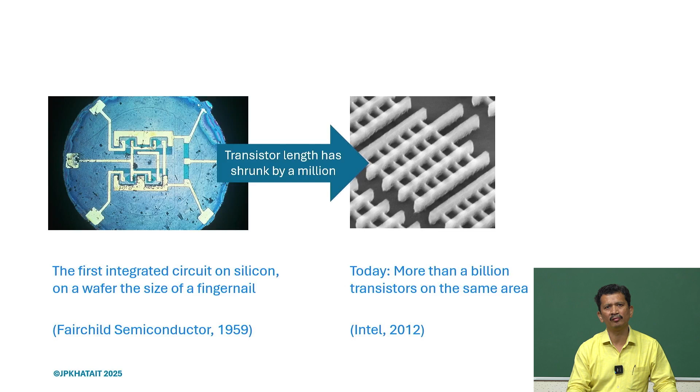So, what you observe here is that in 1959 Fairchild Semiconductor produced the first chip, the size of a fingernail, the first integrated circuit on silicon on a wafer. But now, in 2012, the size of the chip is the same, yet the number of transistors on a chip has increased tremendously, almost a million times, and you now have billions of transistors on the same chip.

And Intel has projected that by 2030 there will be 1 trillion transistors in a chip. So, you can see how things are moving. It is not that the size of the chip is increasing, but the size of the transistors is decreasing, and we are cramming all those transistors into the same footprint, almost the size of a fingernail tip.

If you want a very good overview of the semiconductor industry and how it has evolved, this is a very good read: Chip War by Chris Miller. What we realize is that today semiconductors are the new oil, driving everything. If the semiconductor industry gets affected and the chips are not delivered in time, nothing will move, because it affects the production of every product, machine, and equipment we use today.

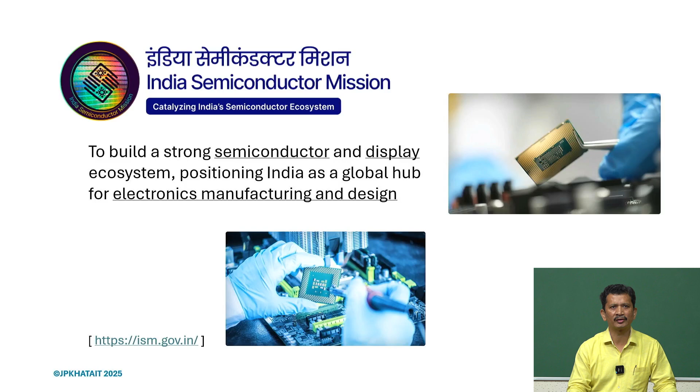We are also not behind. Though we started late, the government has started the India Semiconductor Mission, with the emphasis to build a semiconductor and display ecosystem, positioning India as a global hub for electronics manufacturing and design. Under this initiative, 76,000 crore is already invested, and 5 projects are approved for the semiconductor and display manufacturing ecosystem in India. So, are we ready for that, or are we simply relying on instruments or machines built elsewhere?

If semiconductor manufacturing is coming to India, what kind of support can we provide? Can we design and develop systems for our own use? Do we have the manpower and the know-how, so that we are not totally dependent on others, but can develop these systems and slowly localize semiconductor manufacturing here in India?

So, I think it is very important to understand what the semiconductor manufacturing ecosystem looks like. There are several processes. We have wafers, so a lot of wafer makers will be involved. Then there are several processes: cleaning, deposition, lithography, etching, CMP, and packaging.

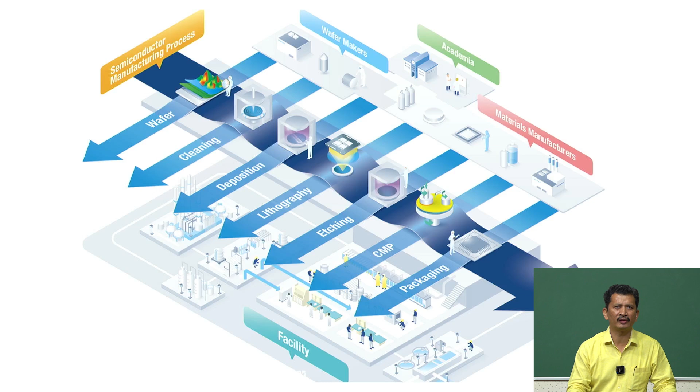So, first try to understand how these chips are made, and if you do not know, you may be surprised to know that the raw material for these chips is actually sand. So, we start with the sand, and then it is melted, and we try to get pure silicon in its purest form, and then you convert into silicon ingots, and then it has to be sliced into thin wafers,

and the wafer will be the input material which undergoes a lot of chemical processes, different kinds of processes under different kinds of machines, and ultimately chips will be delivered. So, going further, we start with the silicon ingot. We do the slicing there, first slicing, and the quality of these wafers may not be very good. So, it has to be polished to the requirements. The order of thickness of these wafers might be about 700 to 800 microns.

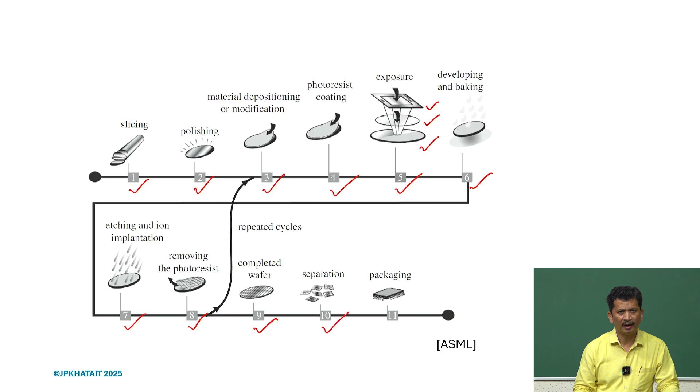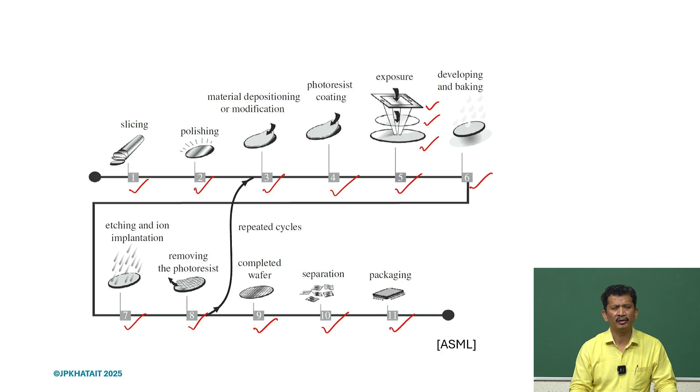Like etching, ion implantation, and we'll remove the photoresist. Then there will be many repeated cycles, because we will be creating layers and layers, and once the entire process is completed, we get the completed wafer, and this wafer has many chips. They will be separated, diced, and then these individual chips will be packaged, and we will get the devices. So, each and every step is very intricate and involves a lot of precision processing and precision instruments, machines, equipment.

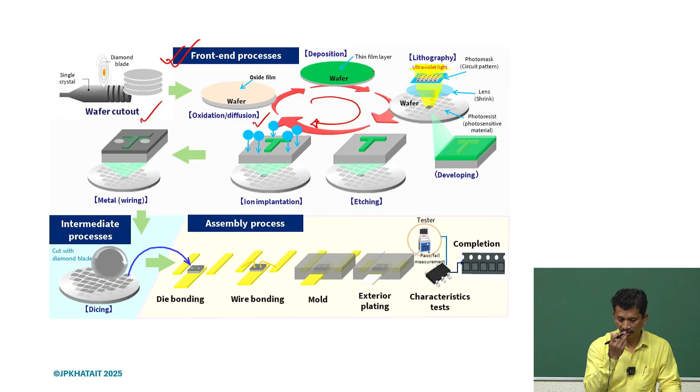So, if we try to characterize, we can divide into different kinds of processes. Usually, one is called front end processes, which involve lithography operations. So, what do you see here? Many cycles. As I just mentioned in the previous slide, we have this wafer, and then there will be oxidation, diffusion. We do a lot of chemical processes. Then a thin film layer will be put there, and then it will come under the lithography system, the design will be shined, and we will do the developing, etching and implantation, and it will be repeated through many cycles.

And then the metal wiring will be done. Again, it is also a kind of deposition process, and once it is done, the dicing will be done, so we will get the individual chips. The assembly process is generally termed as back end processes. We take this individual chip, then die bonding, then wire bonding, mold, plating, and then it will be individually tested, and we will get the device, the chip.

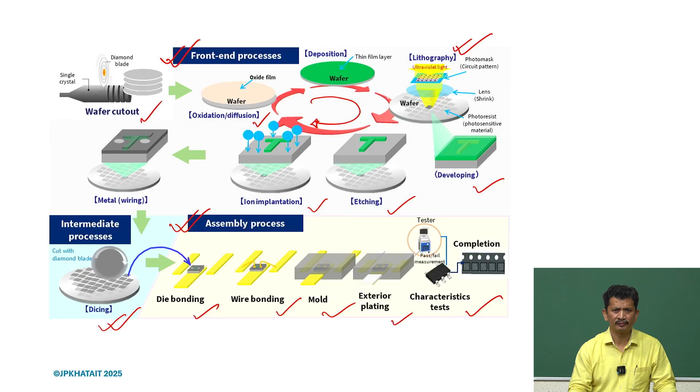So, many processes are involved, and we need to understand how these processes are performed, what are the process requirements, and whether the machines we have or want to develop can meet those requirements. So, lithography is one of the critical steps, and as I mentioned, it is more like photography: printing the circuit design onto the wafer.

We have a light source. It is shined on a mask. The mask has the IC design we want to put on the chip, and there is a lens system. Through the lens, it will be projected on the wafer, and the chip pattern will be made on the wafer. And you can see there are many chips. One single wafer can have many chips, and there are a lot of chemical processes involved, explained here. We may not be going into the details.

We simply want to understand what are the processes and what are the requirements, so that we understand what kind of numbers we are working with, what kind of mechanical specification, design specification we want to have. So, that is the front end process.

But once the chips are made on the wafer, it has to be inspected. Each and every chip has to be inspected. We do not want to have any kind of defective piece. So it's 100% inspection. So there are a lot of processes again involved. There are wafer inspection systems, and of course, if we want to increase the yield, the process cannot be slow. It has to be very fast, but at the same time it has to be very accurate. So under the wafer inspection system, every chip has to be inspected, and the defective chip has to be thrown out.

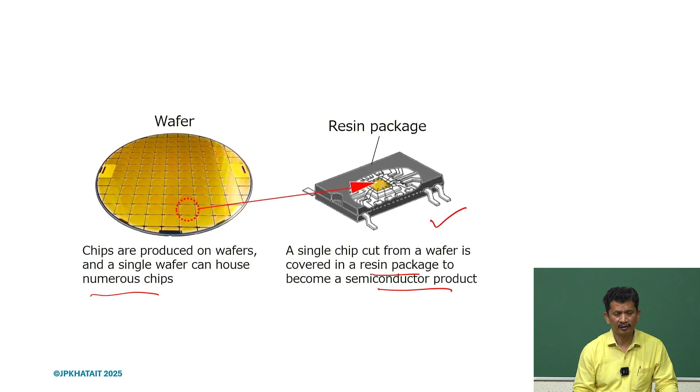So once we have all the chips inspected on the wafer, as I mentioned, in a single wafer we can have many chips. So it will be diced, and then later it will go to the device. So that single chip will be covered in a resin package, and then later we will have wire bonding, and those processes will be there, and then we will get the semiconductor product.

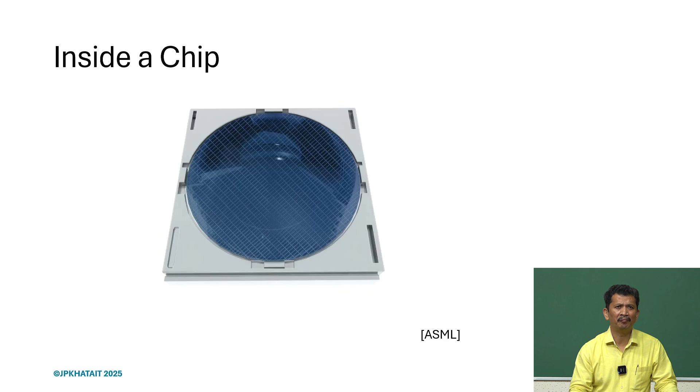So let us have a look inside a chip. Usually the size of a wafer is about 300 millimeter diameter, and the size of a chip is maybe of the order of 5 to 10 millimeter by 10 millimeter, or even smaller. And how are these billion transistors built on a chip? So we just try to understand.

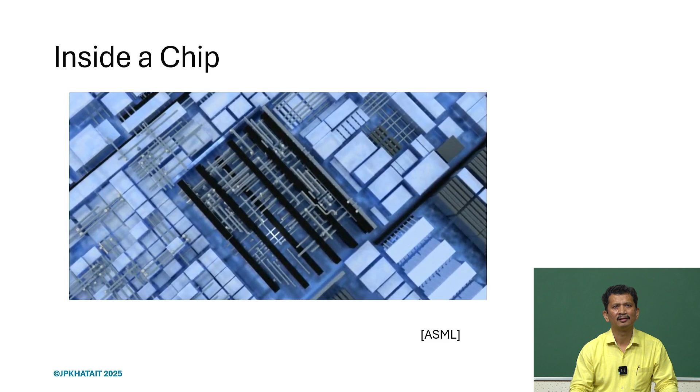So the wafer you see, as we zoom in, we are zooming to a chip level, and now we can see the individual circuits, the ICs, and if we go further, we realize that there are many and many layers. So many layers, and there are interconnections, metallic connections. So it's like creating a 100-story building with the plumbing, with the electrical connection precisely, so that it functions well. The only difference is the size: it will be within the size of a fingernail, 5 by 5 or 10 by 10 millimeter square area, and we have to create these structures precisely to that level.

So we also try to understand the machines. ASML is producing the state of the art lithography systems, and it's very nice to see these systems and understand what are the precision requirements of this system. So we will go through that, and we will watch a small video of the system here.

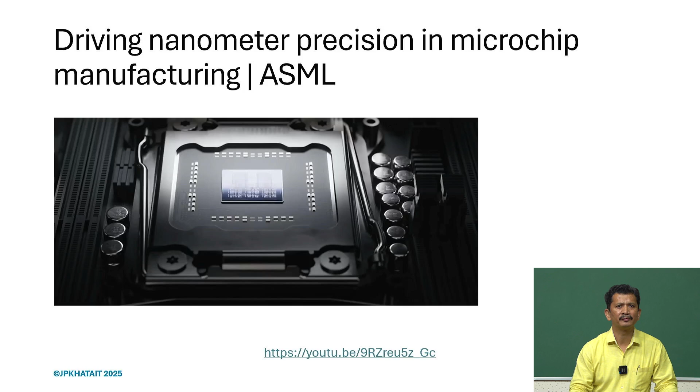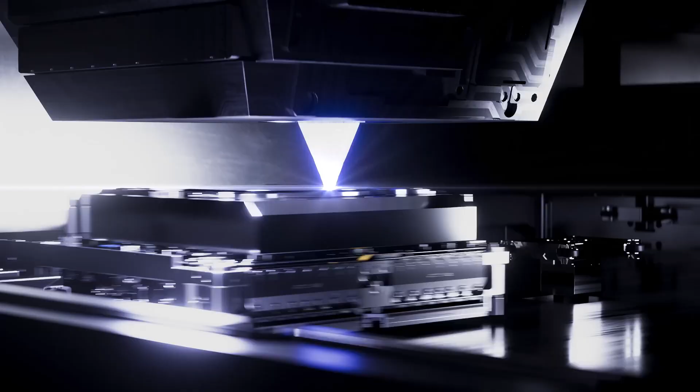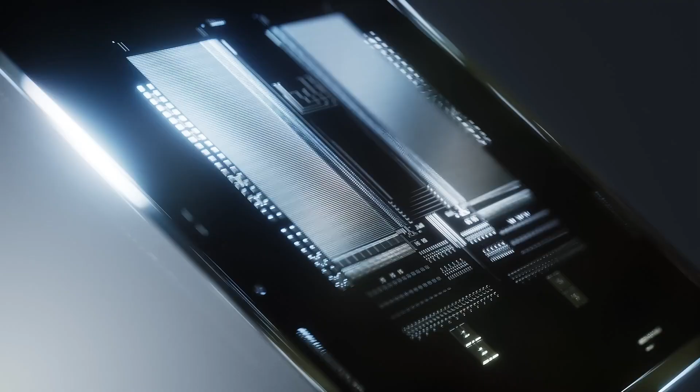A chip is a tiny skyscraper. Its circuitry often includes billions of transistors and stretches through more than 100 layers, and every structure needs to connect perfectly. At ASML, we build hardware and software that helps our customers mass produce this microscopic circuitry. Our lithography systems print chip patterns by shining light from a source onto a blueprint or mask, and then harnessing that light with optics to transfer the patterns to silicon wafers. But in the world of nanometers, physical and chemical processes deform the pattern. So as chip features continue to shrink, lithography becomes more challenging and more crucial. As lithography experts, we fundamentally understand the processes that influence chip patterning, and we develop models and algorithms that predict how a pattern will print on a wafer. Using these insights, we can then adjust for any deformations and tune the lithography system to produce the best possible image. We call this computational lithography.

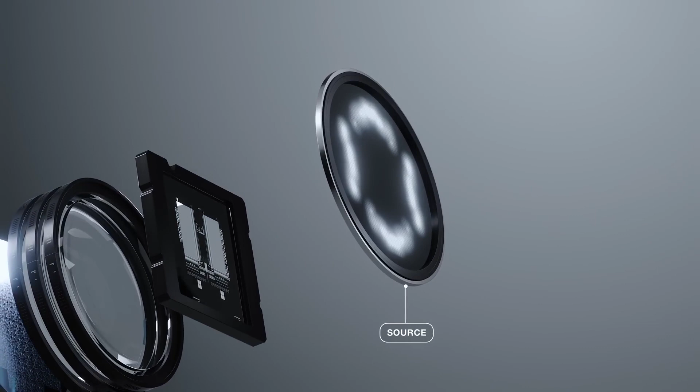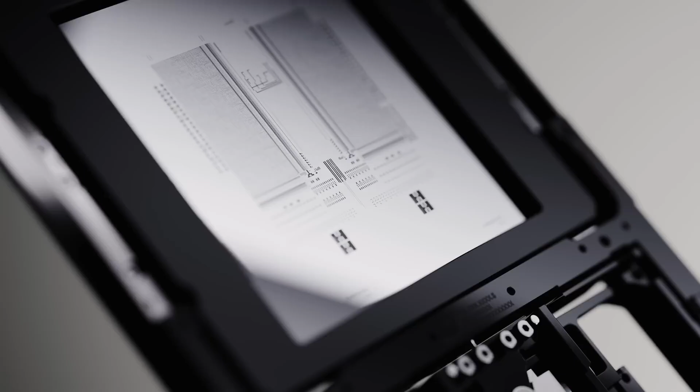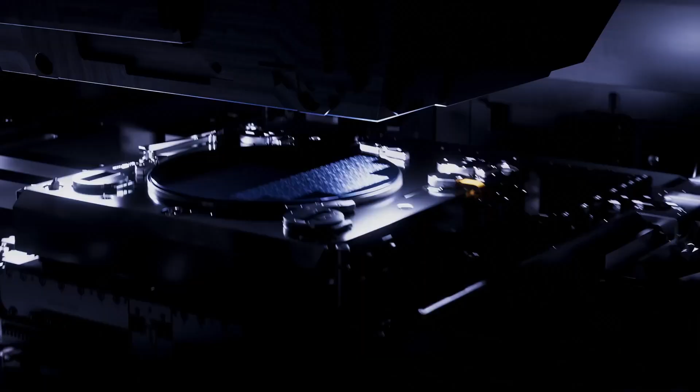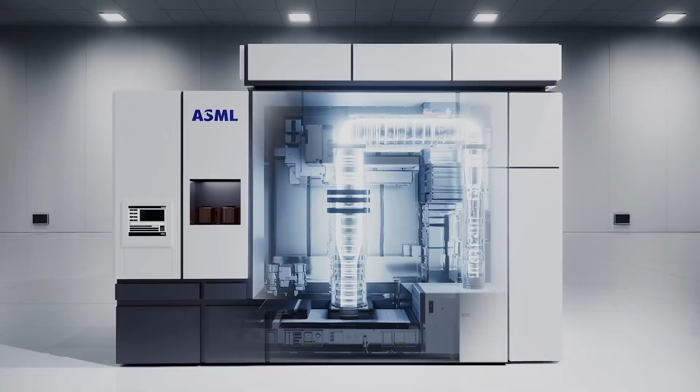First, our source optimization tools meticulously adjust the illumination to produce sharper images of critical chip features. Our mask optimization tools design masks that correct for optical effects, so chip patterns appear exactly as intended on the wafer. Light heats and deforms the optics, so our wavefront optimization tools reshape the light once more to ensure that the pattern prints correctly. And we do this pattern by pattern, layer by layer, chip by chip, wafer by wafer, at the volume, speed and robustness our customers need for mass production. As these tiny skyscrapers continue to grow and their features continue to shrink, our task only gets harder, but we're up to the challenge. We're committed to powering technology forward with you.

If we try to understand the entire process, not only the lithography systems but once chips are made, how they are packaged, what kind of inspection systems and other processes are involved, we can look into Taiwan's mega factory, TSMC, one of the foundries for semiconductors, to get a good sense of the technology requirements. If we want to support the semiconductor mission here in India, we also need to upgrade ourselves and understand the design philosophy to create those machines, and the efforts required, not only to service or support the machines we get from abroad - from Netherlands, US, Japan, Taiwan - but also to develop these systems here to support the Make in India effort, so we can design and make systems ourselves, getting cost benefits while maintaining the same quality.

There are several steps and modules, and it is a very modular design, so it does not affect the entire system. If one module is affected and not functioning well, it can be easily replaced by another. These systems have to run continuously without any break, because the moment there is a breakdown, it affects the process, it affects the yield, and therefore the cost of the chip will increase. What we want is for the cost of the chip to not increase, so we are able to afford all these systems with these powerful chips.

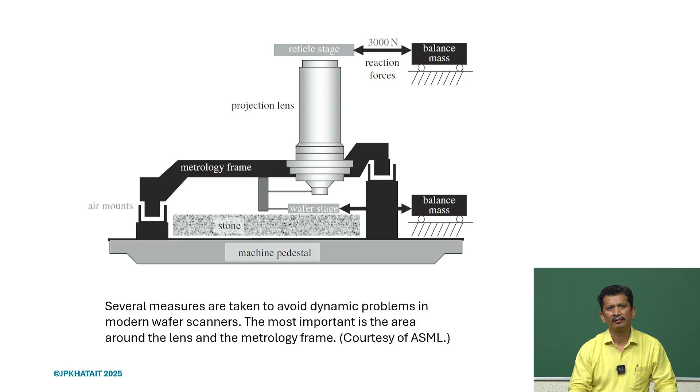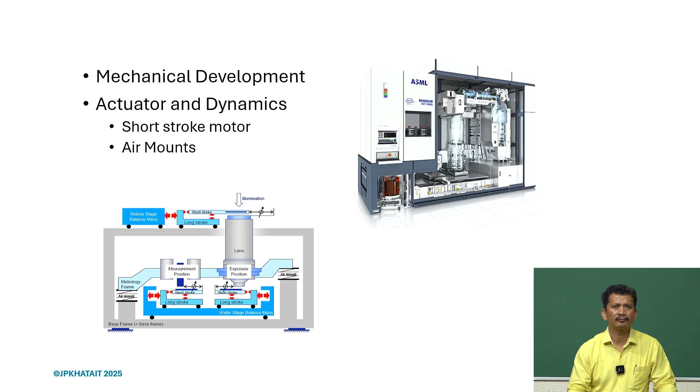A lot of mechanical development is required here. We need to work on the actuator dynamics - there are longer stroke and shorter stroke motors, and air mounts. All those challenges and key aspects we have to look into and work on. The challenge is how to maintain accuracy with such high speed moving systems, since the speed and acceleration are definitely very high, and how to achieve thermal stability and crash robustness.

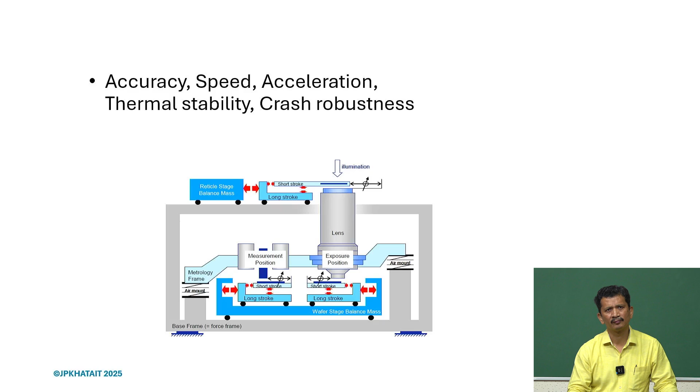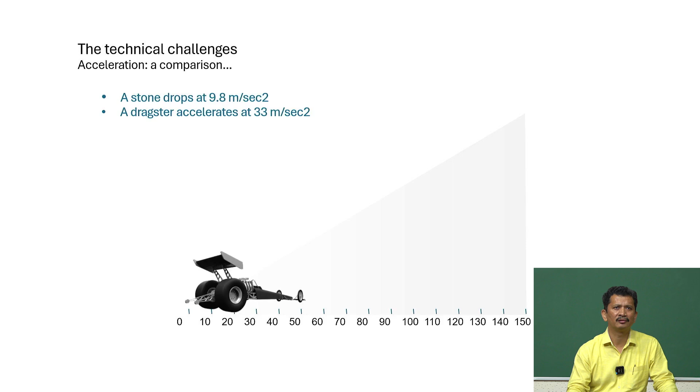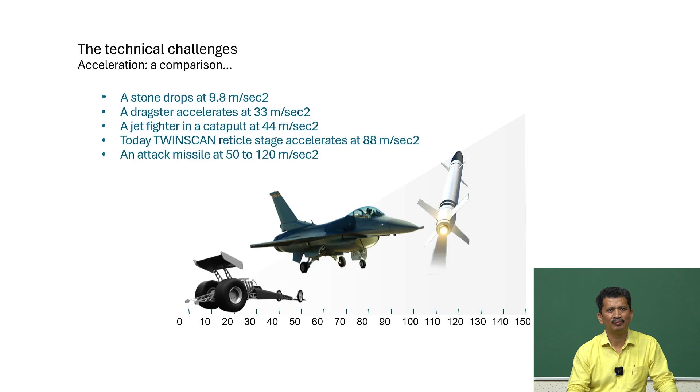To get an idea about the acceleration and how fast these systems move, we can compare: a stone drops at 1g, that is 9.8 meters per second squared. A dragster moves at 3g, 33 meters per second squared. A jet fighter has 4g acceleration. The TWINSCAN system already moves at 88 meters per second squared, which is 8g, or roughly 9g we can say. A missile reaches 50 to 120 meters per second squared, so 5 to 12g.

The reticle stage used in ASML systems or lithography systems is already targeting 15g, so they are moving with that high acceleration.

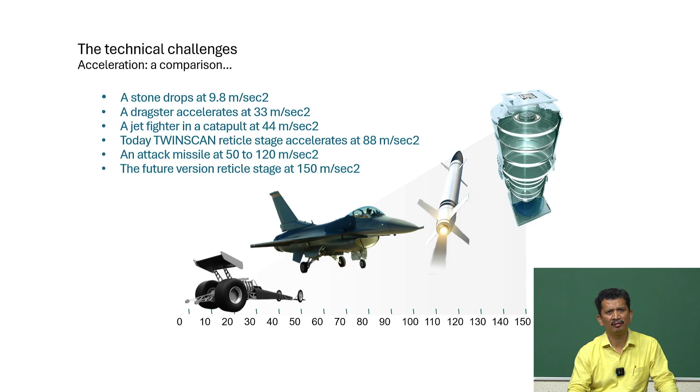So this is the state of the art, this is what we get. What we need to understand is that if we really want to support the semiconductor industry, it is not just the design of the chips, but how to get that chip design onto a silicon wafer and then to a chip.

The manufacturing aspect, the mechanical design aspects, the control, electronics - the entire engineering community needs to work together to solve this problem so that we can at least support these facilities, and later create our own systems to support semiconductor manufacturing in India.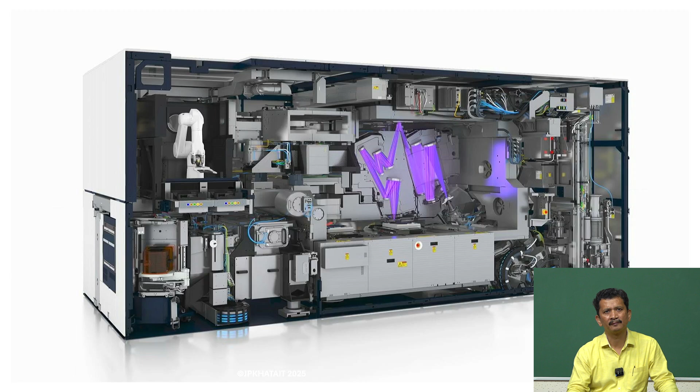So again, different elements - this old number is $140 million, roughly 1,200 crores, but the latest system is even more. So one can expect what the value proposition is and what the cost of building these systems is.

A small effort may not be enough. I think effort from the industry, from the academia, and from the government is required to build such facilities and to run them well.

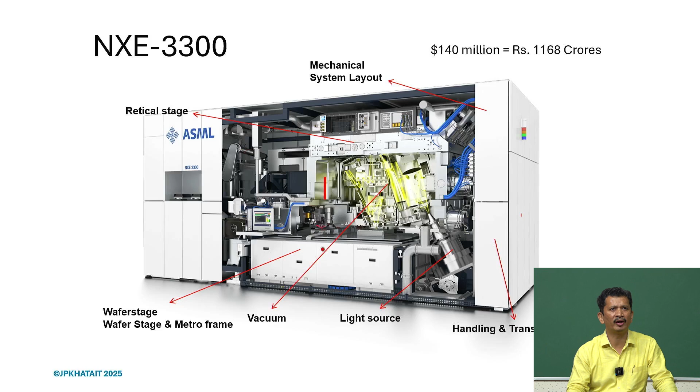On the other side, once the chips are made, once the wafer is complete, it has to go through various processes, which I mentioned earlier, termed back-end processes - for inspection, wafer inspection and metrology. There are many chips on a single wafer, and each chip has to be inspected for quality and validated in a super fast way.

So how to achieve that? What are the key elements? If we check this, the key enabler is these motion stages, XY motion stages, many times.

So I think this is one of the key objectives of this course - we should be able to design these motion stages, achieving precision levels not just of microns, but going down to nanometer levels.

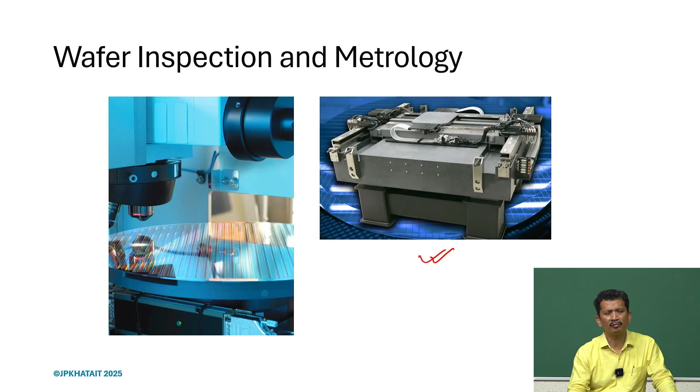Therefore, it is very important to understand the requirements - what are the design principles for precision machines, whether conventional design can produce these systems, and many times we realize that may not be enough. There are very different thoughts, very different design philosophies.

Senior, experienced designers may know these principles through practice, but all these learnings have to be taught right from the beginning, so that once you graduate and complete these kinds of courses, you should be able to appreciate and understand how these systems are built, and later apply this philosophy to design state-of-the-art machines and even consumer products for today's use.

Because at the end of the day, even normal machining and normal processes also need high precision. So we try to understand each and every component of a precision machine, how to achieve that, what the design principles are, and as we mentioned, we try to bring deterministic behavior into our design.

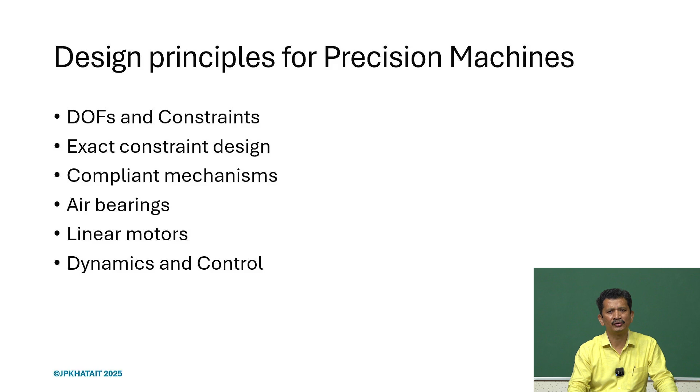So we will start these topics one by one from the next lecture. Thank you.